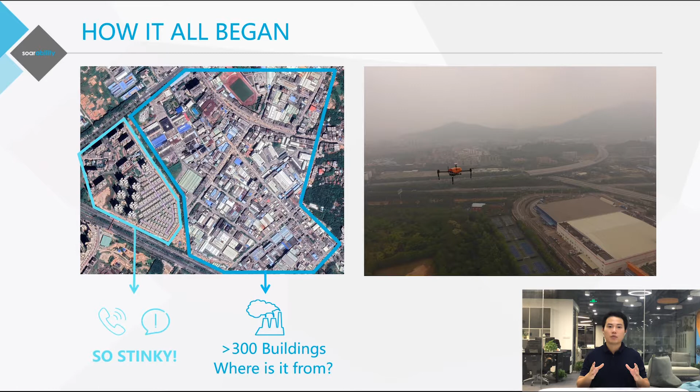We brought our multi-gas sensing drone prototype, flew for just 1 hour and 20 minutes, and successfully found a location where the volatile organic compound concentration is much higher than the background concentration.

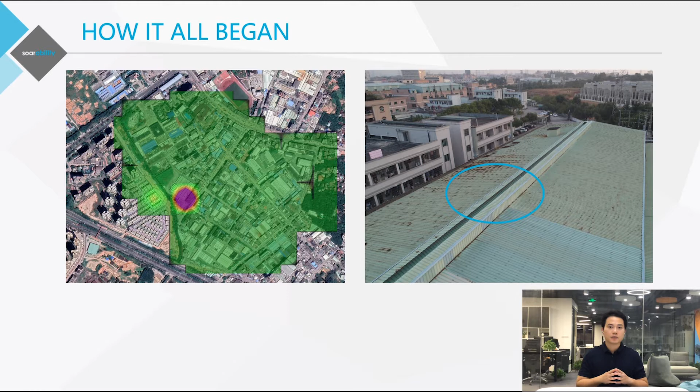The local EPA was completely blown away because, according to what they said, our prototype helped them boost their efficiency for more than 60 times. Not only I, but the whole team was convinced that drone-based gas sensing is able to deliver tremendous value.

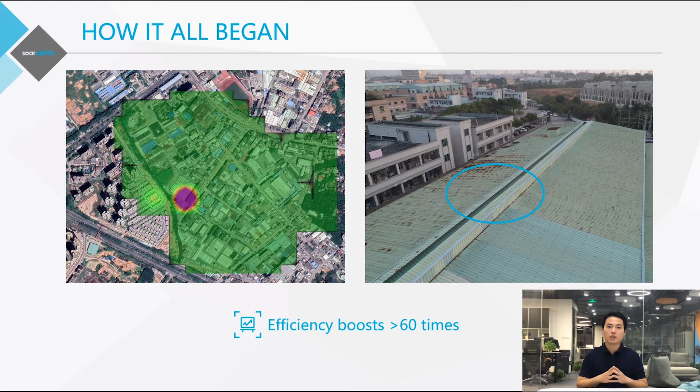Throughout our very first case studies, we have not only been able to validate the concept, but also envisioned 3 core value propositions of drone-based gas sensing. First is rapid deployment and result delivery. You can send a drone to analyze the air content at a certain location and obtain the result instantly.

Secondly, with the use of GPS and RTK, drone-based gas sensing can achieve unprecedented ultra-high 3D spatial resolution that is typically 100,000 times more than that of current fixed monitoring stations. Users are able to extract much more information from the high spatial resolution gas data.

Thirdly, risks are reduced simply because you can assess the scene from a safe distance, identify the types and spreads of toxic gases, and define a safety perimeter.

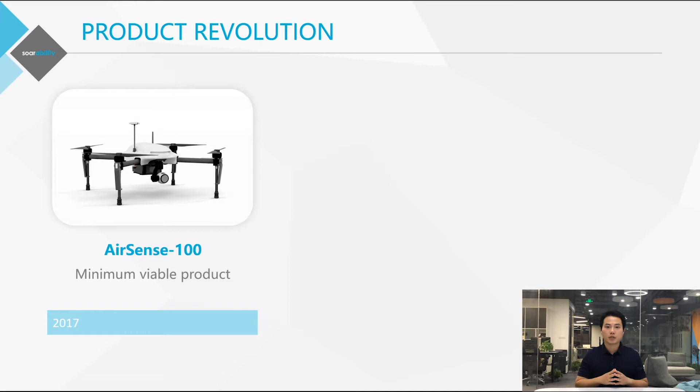Over the past 4 years, these 3 core value propositions that we envisioned have been guiding our product development and iteration. We developed a minimum viable product called AirSense 100 in 2017, and we released our first mass-produced product, Sniffer4D V1, in 2018. I believe many of you have seen this in last year's AirWorks.

We work closely with our users to make sure that we really understand their workflow and pain points. After years of R&D and testing, in March this year, we announced Sniffer4D V2, which improves upon Sniffer4D V1 in almost all aspects.

Currently, we have more than 300 Sniffer4D users across 26 countries. I'm going to give you a few highlights on Sniffer4D V2, mainly the features that really contribute to the core values. Thanks to our patented 3-dimensional sensor array design, we are able to integrate 9 high-quality sensors and so much other functionality into such a compact and lightweight body.

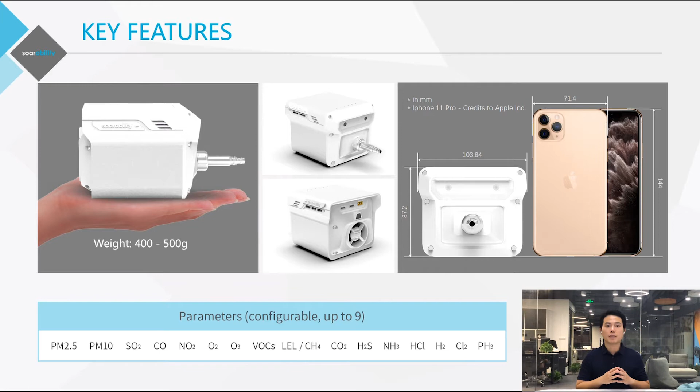When mounted on a DJI Matrice 300 RTK, the whole system is able to fly for up to 47 minutes. We worked closely with DJI's Payload SDK to create seamless integration with DJI Matrice 300 RTK and Matrice 210 aircraft.

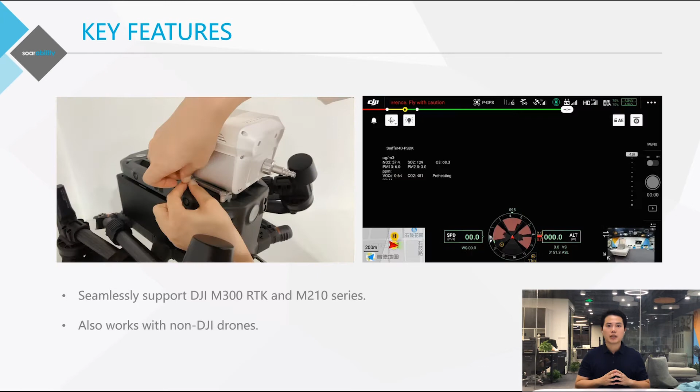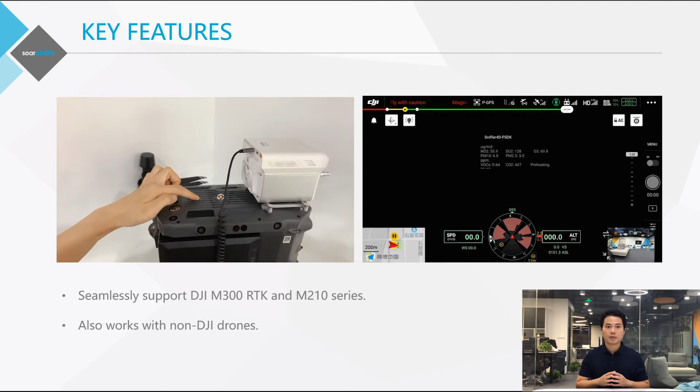Mounting is very simple and doesn't require any additional tools. You can view the real-time readings and control the Sniffer4D directly on the DJI Pilot app. Sniffer4D V2 is also platform agnostic.

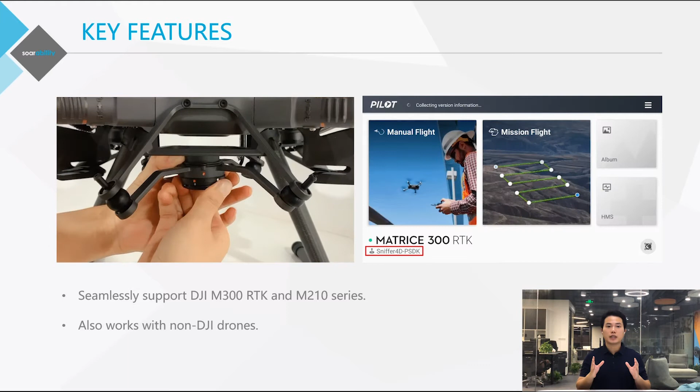It can potentially be mounted on non-DJI drones because it has all the necessary functionalities built in its body. So all you need to do to make it work is to power it up. We understand that reducing the preparation time is critical for users such as first responders. Sniffer4D V2 is the world's first drone-based multi-gas sensing solution that only requires less than 20 seconds of warm-up time. This greatly helps our users to race against time during emergency.

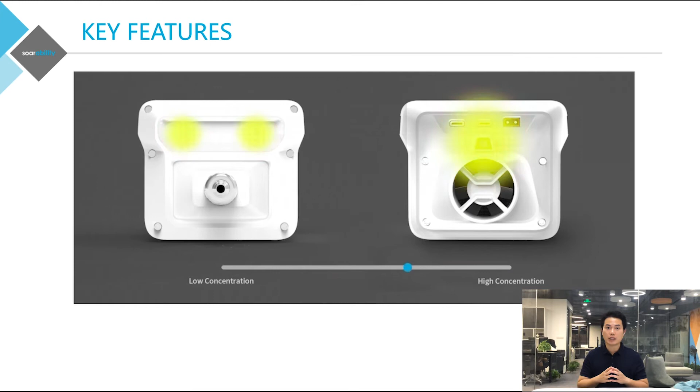In some scenarios, it is important to notify personnel near the drone about current gas concentrations. Sniffer4D V2's front and rear high brightness warning LEDs can automatically vary its color based on the thresholds set by the user. This feature is also very useful in showing the boundary of a safety perimeter for on-site personnel.

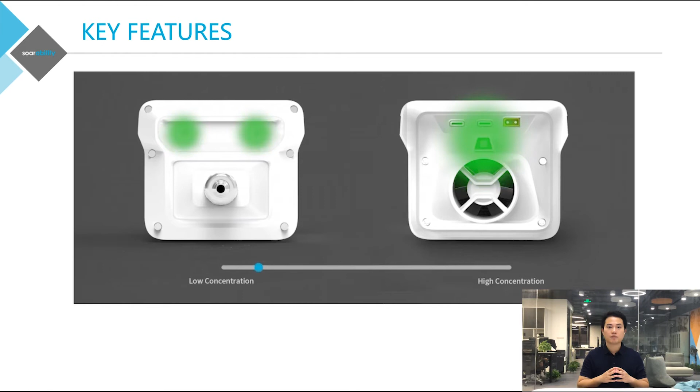Some scenarios require taking an air sample back to a laboratory for more in-depth analysis. Sniffer4D V2 allows the user to control when and where to collect an air sample. It is so intelligent that it even monitors the pressure inside the sample bag and automatically stops when the bag is full.

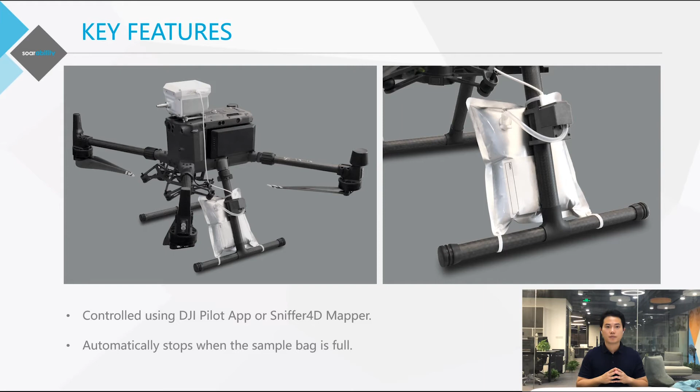Through the years, together with our university partners, our R&D team has invested a tremendous amount of effort into developing our proprietary signal processing hardware and algorithms. This results in our industry-leading data quality. For example, we can achieve R-squares of approximately 0.9 when comparing long-term with a scientific-grade ambient air monitoring station.

In some scenarios, it is critical to be able to inform other people or teams that are far away from the site. Sniffer4D V2's built-in cellular connectivity allows users to view real-time readings and data visualization using any PC, anywhere. Our data visualization software, Sniffer4D Mapper, is a powerful tool for converting the data from Sniffer4D into intuitive and actionable information.

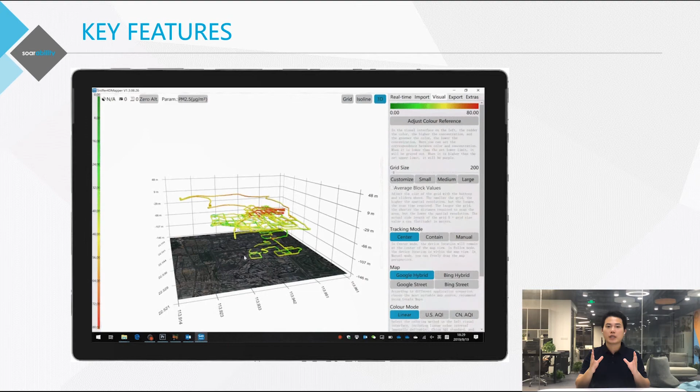It is able to generate gas concentration grid maps, isoline maps, and even 3D maps that reveal gas concentrations at different altitudes. Viewing live camera feed, for example, from a DJI H20T is also possible in Sniffer4D Mapper.

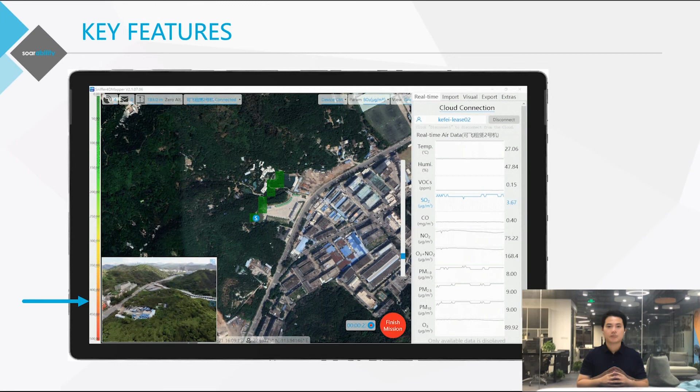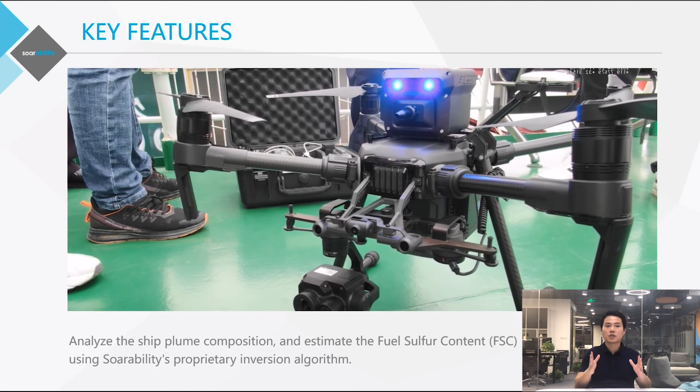With Sniffer4D Mapper, work reporting is greatly simplified. You can generate a mission report or a datasheet through a one-click operation. Sniffer4D V2 can also be used for ship emission monitoring. You can fly it into a ship plume and it can automatically estimate the fuel sulfur content of the ship using its built-in inversion algorithm.

In the drone-based gas sensing niche market, there are opportunities not only for manufacturers like Soarability, but also opportunities for integrators, distributors, and service providers. This is because the market penetration rate is still very, very low. And this kind of product requires professional training and after-sales support and services. We, as the manufacturer, don't typically do direct sales to the end users.

There are challenges in increasing the market penetration rate. One of the most important challenges is to build up an effective global distribution network, which involves extensive training for the distributors so that they can go out and convince the end users by providing high quality demo and pre-sale consulting. Now, we have worked with some of the most excellent and pioneering distributors worldwide, and we are looking forward to collaborate with even more distributors to really unleash the potential of drone-based gas sensing.